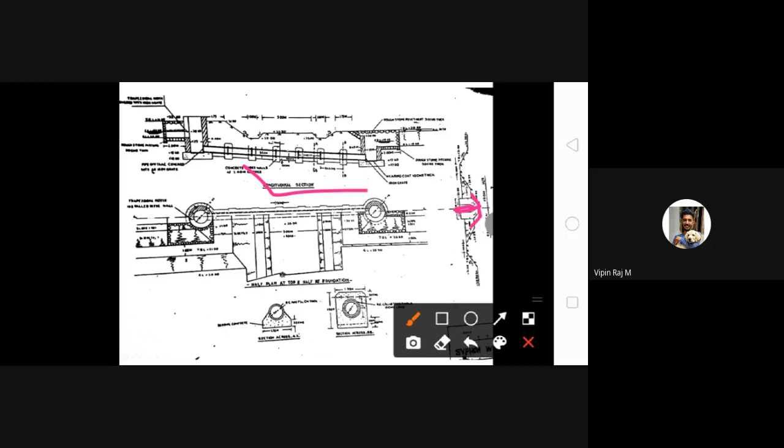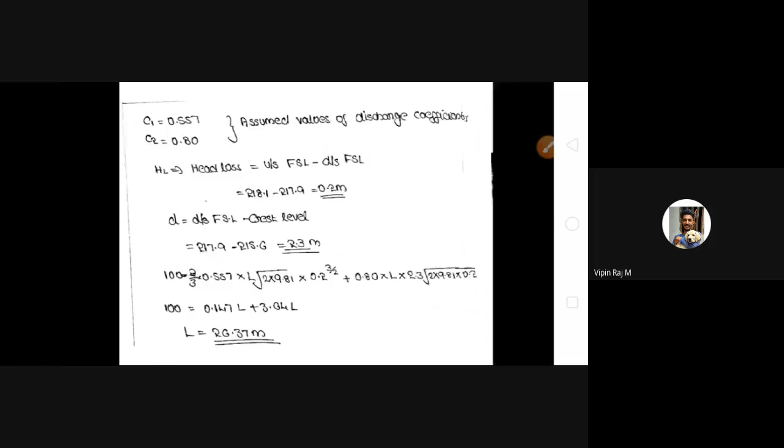So in the last class we discussed the design of cross regulator. Today also we are discussing the design of cross regulator itself. Yesterday we determined up to head loss. We completed our first step, that is design of crest, and then we move on to the second step, that is the length of waterway.

In order to determine the length of waterway, we use an equation Q equal to 2 by 3 into C1 into L root 2G into head loss raised to 3 by 2 plus C2 into L into D; here L, D are two different terms, so write it as L into D into root 2 into G into HL. Okay, you should by heart this equation.

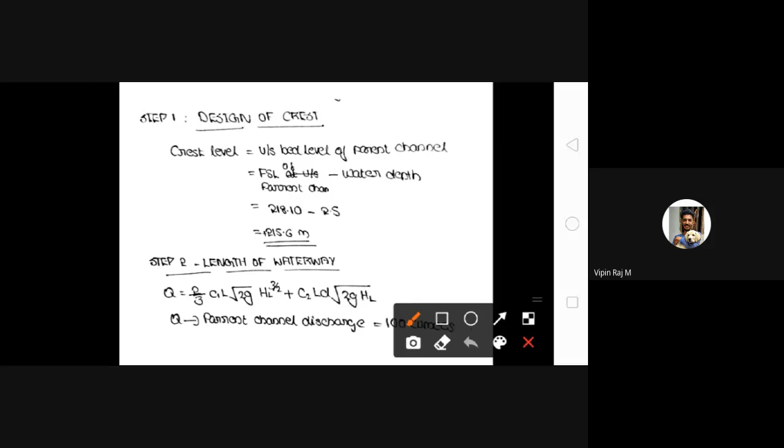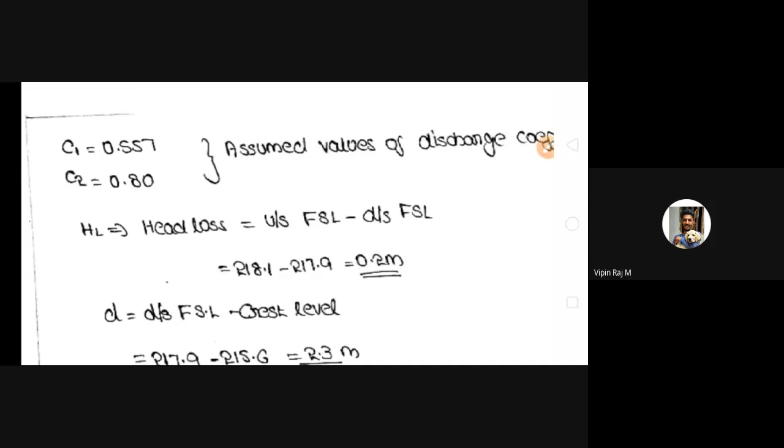And in this equation, we assume the value C1 is 0.557. We assume the value C2 as 0.80. We also determine the value of head loss. Head loss equal to upstream FSL minus downstream FSL. We get the value as 0.2 meter. Okay, then in this equation, there is another parameter which is D. So we need to find out the value of D.

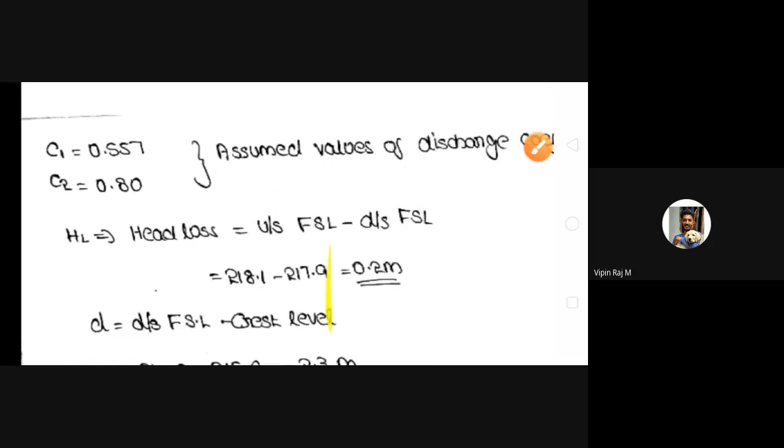Okay, how can we determine the value of D? D is downstream FSL minus crest level. Okay, what's the crest level? We already determined the crest level as the bed level of, sorry, upstream bed level. What's the value of crest level? You already determined it in the last class. Okay, 215.6 is the crest level.

Then what's the value of downstream FSL? What's the value of downstream FSL? Okay, the value of downstream FSL is 217.9.

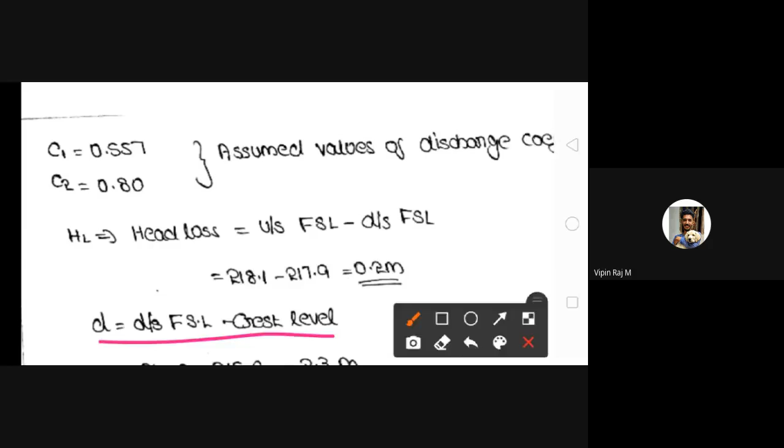Okay, then all of you put your answer in the chat box. What's the value of D? Okay, we get the value 2.3. Then we get all the parameters except L in this equation. So substitute these values in this equation and determine the value of L. I already substituted the values.

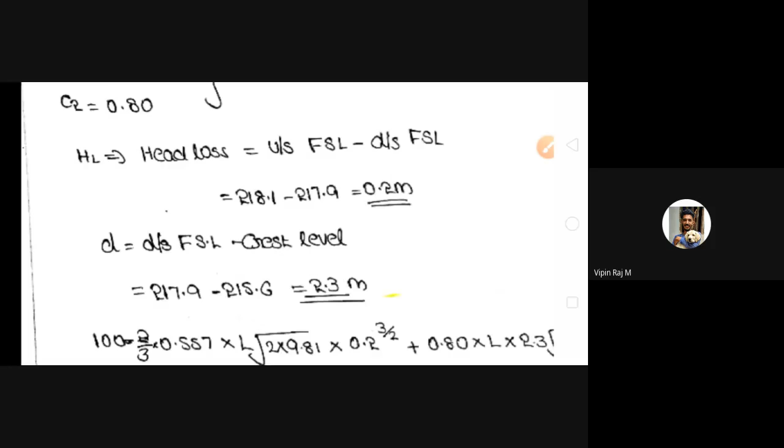100 equal to 2 by 3 into 0.557 into L into root 2 into 9.81 into 0.2 all raised to 3 by 2 plus 0.80 into L into 2.3 into root of 2 into 9.81 into 0.2. Okay, this is the substituted equation. Please go through the equation and find out the value of L. Or you can simplify the equation.

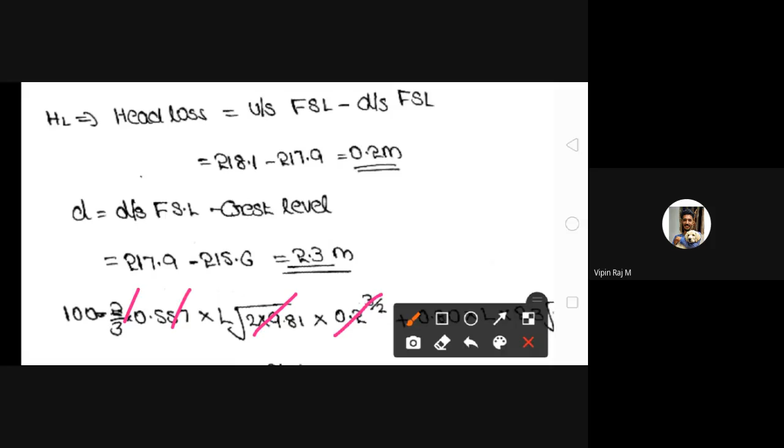Firstly, you find the value of 2 by 3 into 0.557 into root 2 into 9.81 into 0.2 all raised to 3 by 2. Firstly determine that value. Aduna, what's the value? Just take the first part only. What is the value of the first part? Aduna? Okay, Adira. Okay, 0.147. Correct. Then take the second part.

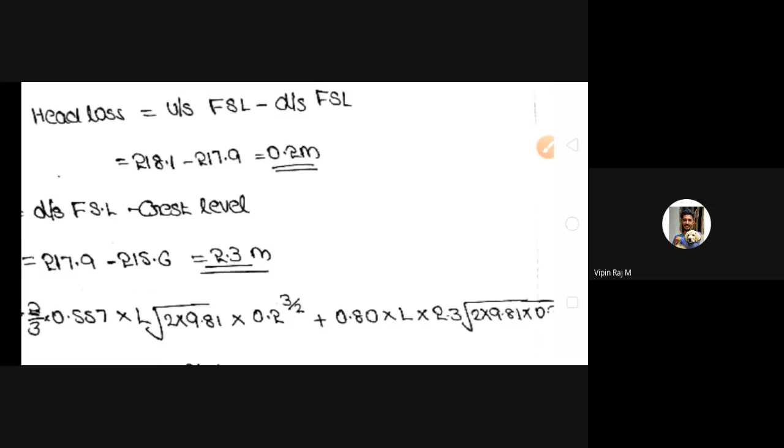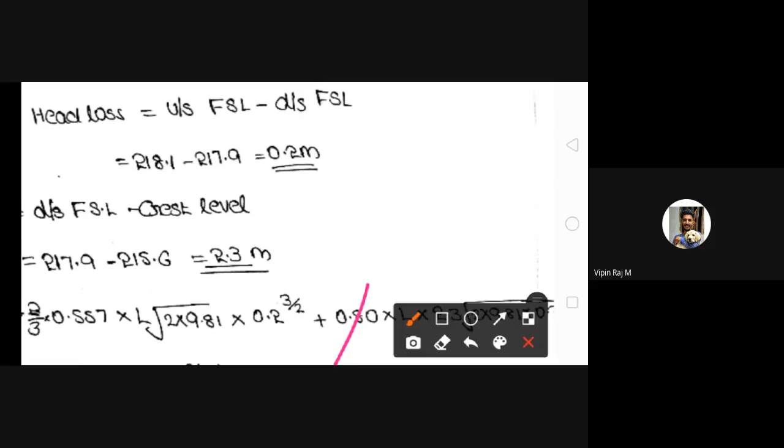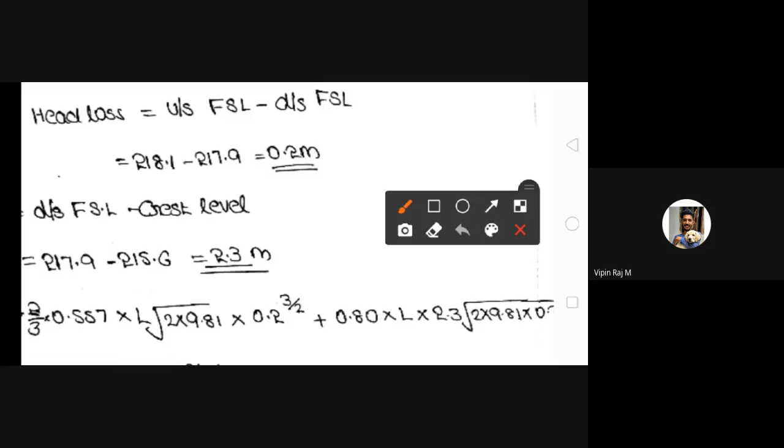0.80 into 2.3 into root of 2 into 9.81 into 0.2. Take the second part, then determine the value of the second part. Danya, please do the calculation and put the answer in the chat box. Second part only. Danya. Okay, Sijin. Okay, 3.64. Correct. So we can write the equation like this.

100 equal to, that is our full supply discharge, 100 equal to 0.147 L plus 3.64 L. From this, determine the value of L. Determine the value of L. Sandra Casey, determine the value of L.

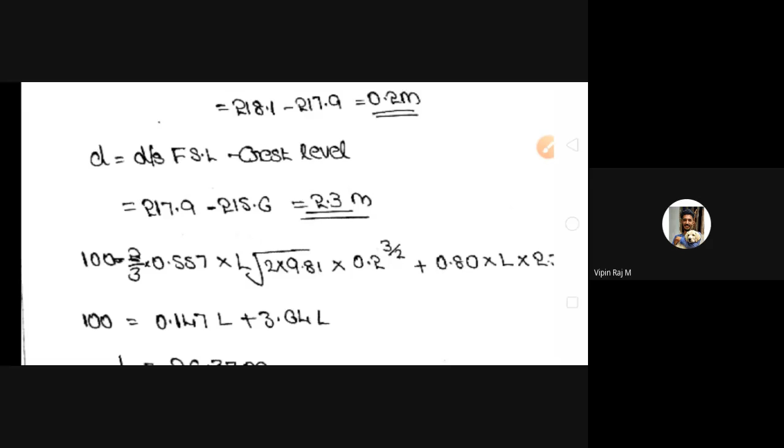Okay, 26.4. Very good, correct. So we get the value of L as 26.37. Okay, what do you mean by this L? This L means this length.

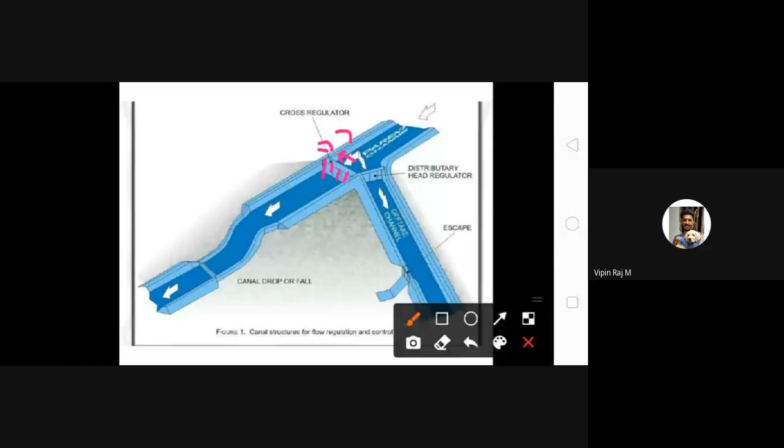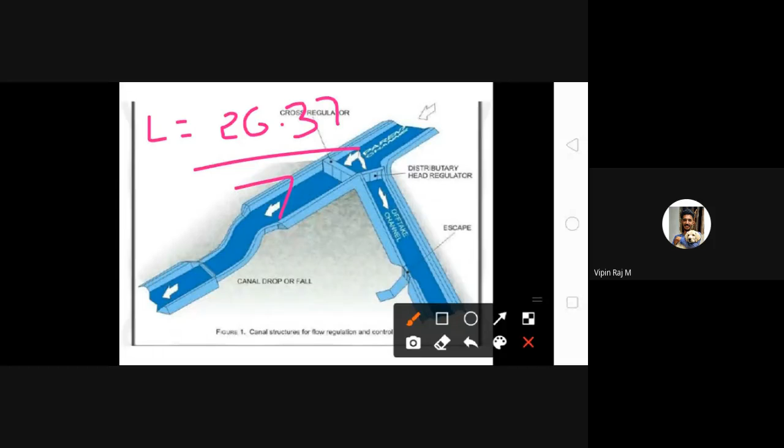Okay, here assume the span as 7 meter. Then determine the number of spans. We know that the total length is 26.37 and the length of each span is 7. Then what will be the number of spans? Number of spans will be total length divided by length of each span. Rishil, what is the answer? Okay. We get the value as 3.7. We can round it and take it as 4 numbers.

Okay. Then we find the actual clear waterway.

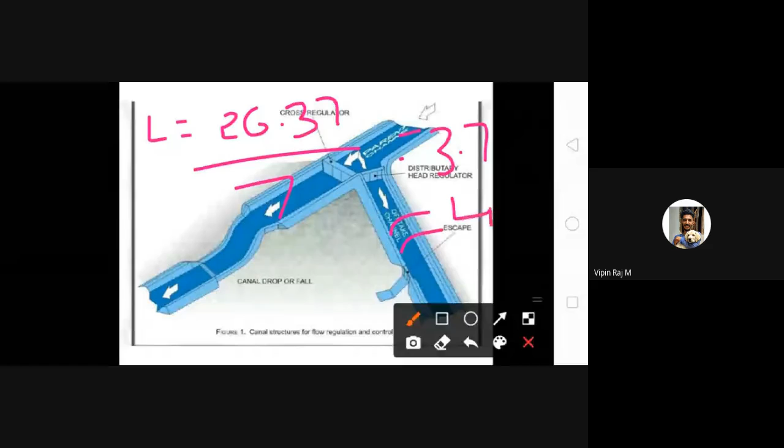So actual waterway equal to 4 into 7. Okay, what will be the actual waterway? Rishil, what will be the actual waterway? Okay, Vipin, what is the actual waterway?

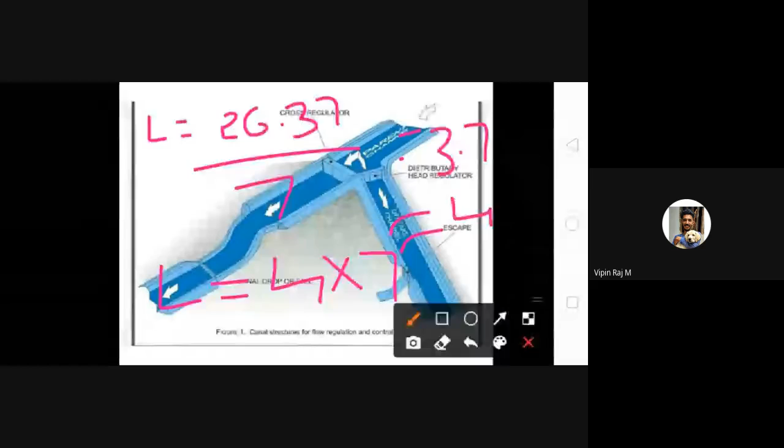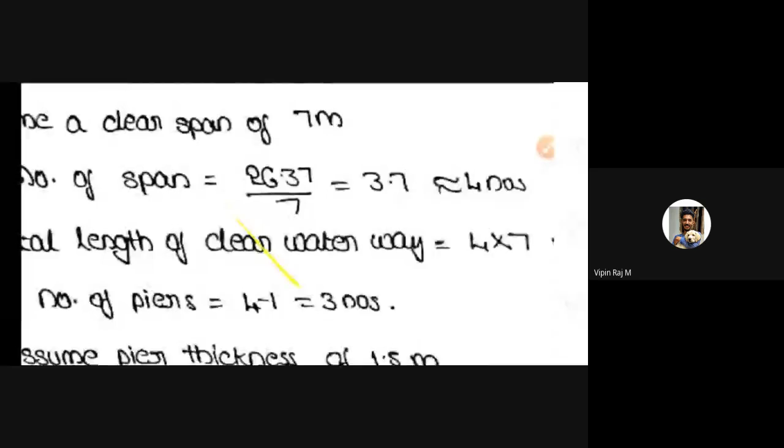Okay, 4 into 7, which is equal to 28. So that's all about the length. Okay, that's all about the total length of clear waterway. We get the value as 28 meter. Did you understand up to this?

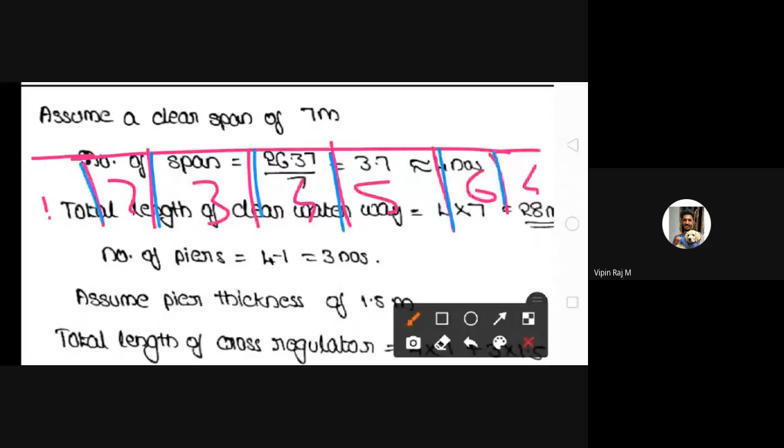Here the number of spans is 4, so the number of piers will be 4 minus 1, which is equal to 3. Okay, then we need to assume the pier thickness.

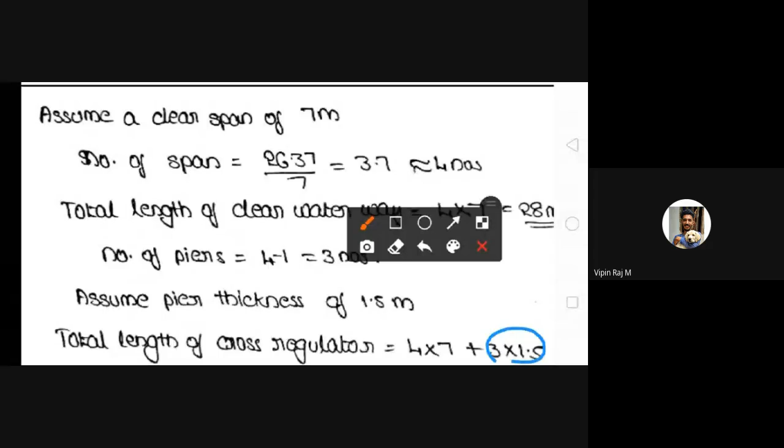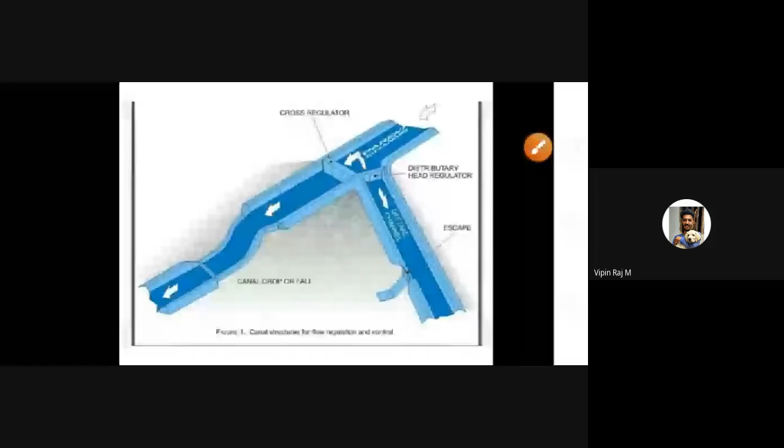Okay, then determine the value of total length of cross regulator. Sandra Vasudevan, what's the value of total length of cross regulator? Okay, very good. We get the value as 32.5. We get the total length of cross regulator as 32.5. So if we take this image, the length from this portion to this portion will be equal to 32.5, and the length of clear waterway...

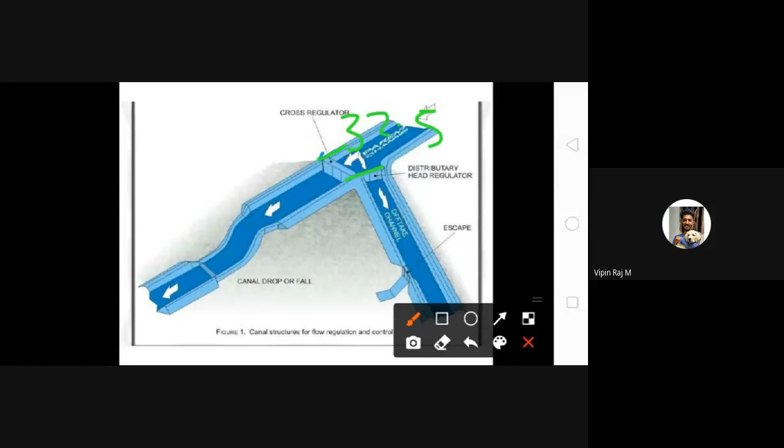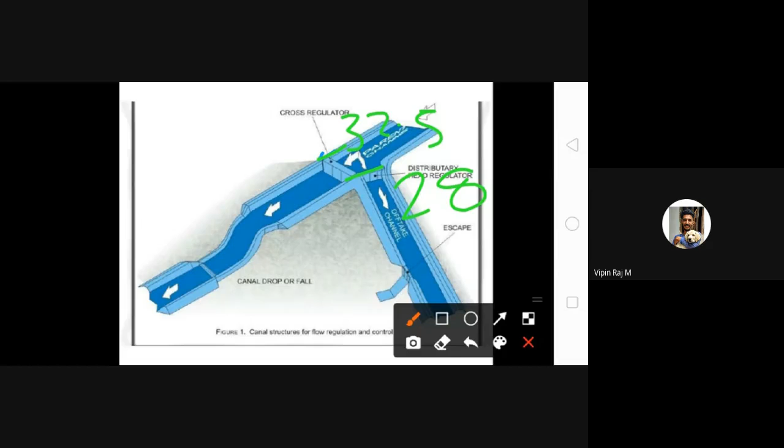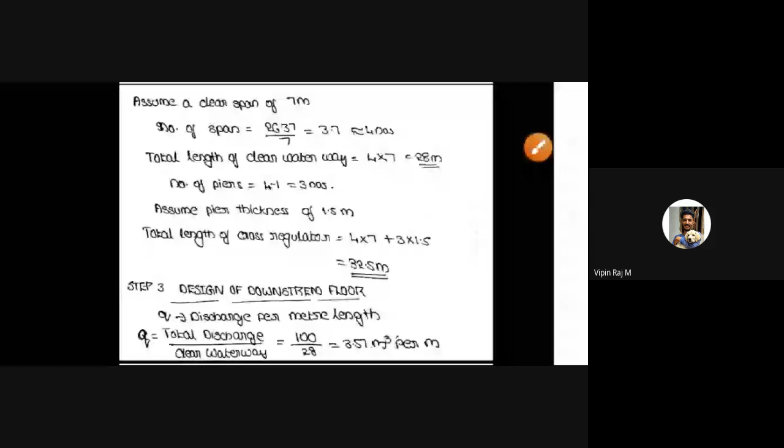So length of clear waterway is 28 meter and the total length of the cross regulator is 32.5. Did you understand up to this? Okay, then we move on to step 3, that is design of downstream floor. Step 3 is design of downstream floor.

Okay, in order to determine the downstream floor level, we need to find out the value of q. q means discharge per meter length. The value of q equals total discharge, that is 100, divided by length of clear waterway.

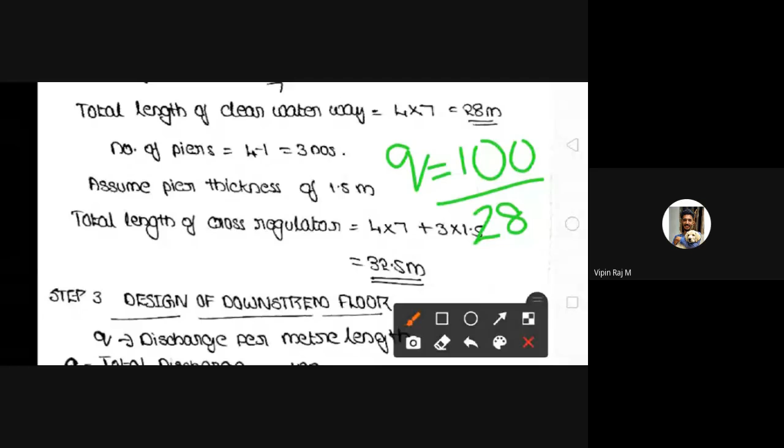The clear waterway length is 28. Okay, so the value of q equals total discharge divided by length of clear waterway. Okay, Sri Lakshmi, what's the value of q? That is discharge per meter length.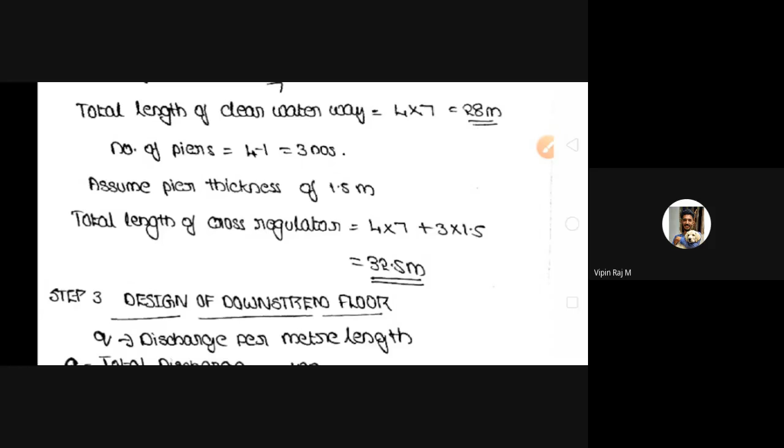Okay, so correct. 3.57. And the unit is meter cube per meter. Here Q means discharge per meter length. So we can write it as 3.57 meter cube per meter.

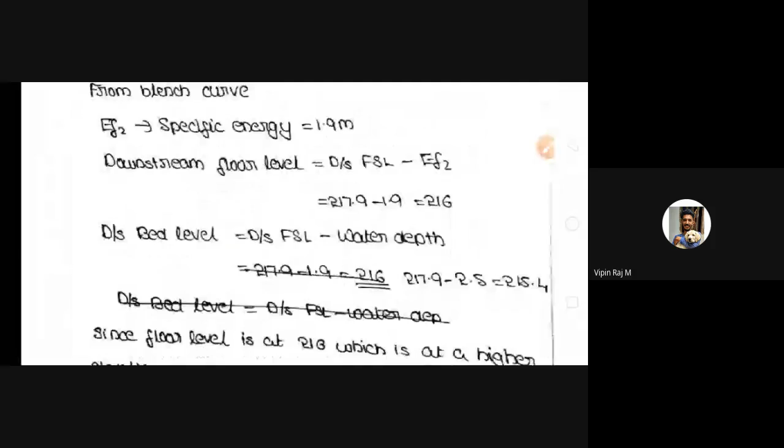Then we move on to Blench curves in order to find out the value of EF2.

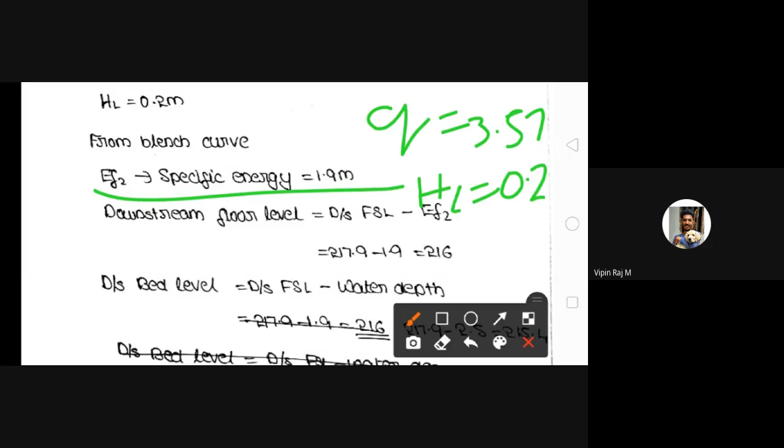Then we move on to the Blench curves. From the Blench curves, we need to determine the EF2. EF2 means specific energy.

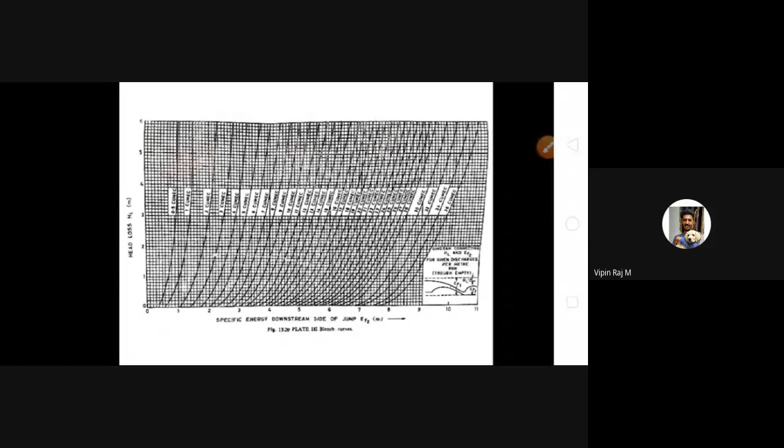So we need to determine EF2 for the further design of cross regulator. This is named as the Blench curve. For the examination, you will be provided with this Blench curve. In this Blench curve, the x-axis is specific energy, that is EF2, and y-axis is head loss. In this figure you can see some curves which indicate Q.

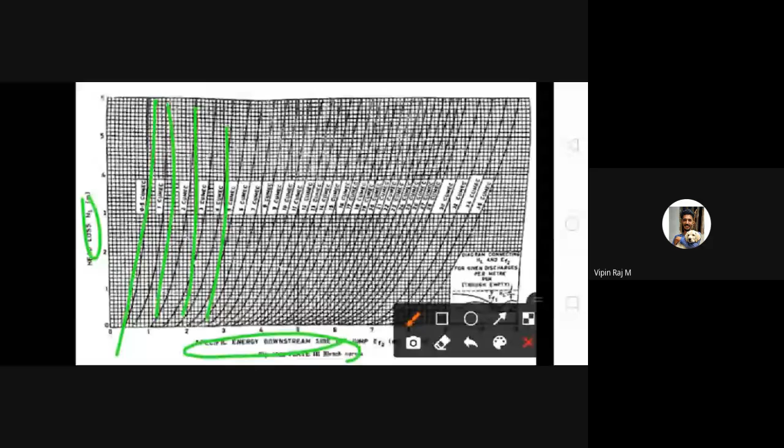So in this image we know two parameters. Head loss, that is 0.2 meter, and the value of Q, that is 3.57. So firstly we move on to Q. Here this is a curve which indicates 3 and this is a curve which indicates 4. But we have the value of Q as 3.57, so assume a curve in between 3 and 4.

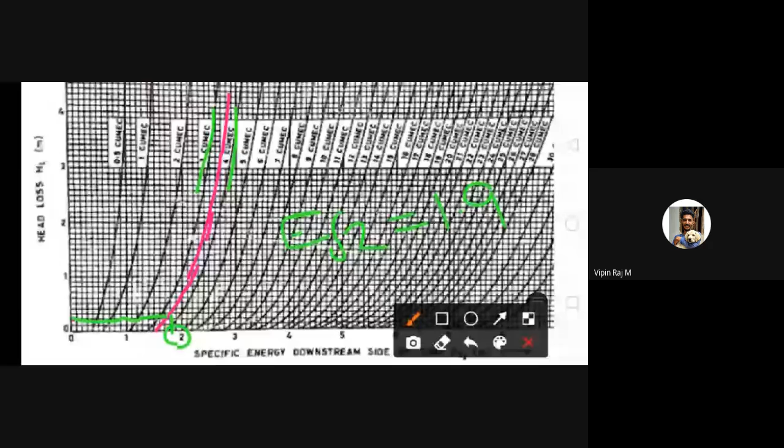Firstly, we take the curve which has the same value of Q. Here, there isn't such a curve, so we assume a curve between 3 and 4, which indicates the curve of 3.57. After that, we project a horizontal line from the head loss, and from the point that this line touches this curve, we draw a vertical line downwards, and the point at which this vertical line touches gives the EF2.

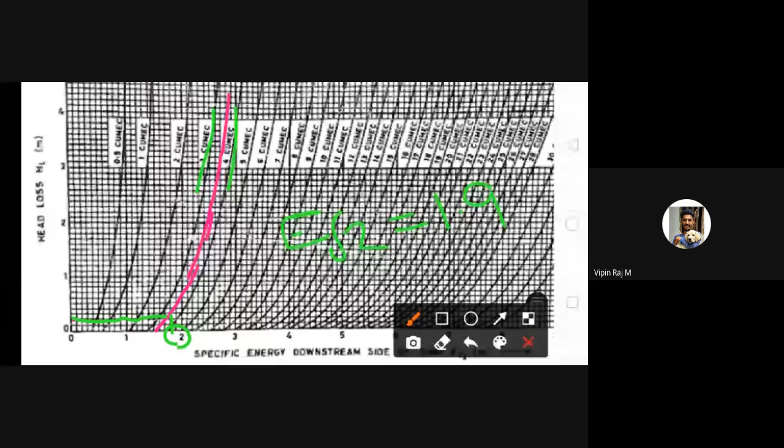So we get the value of EF2 as 1.9. Then, the reason we found this is that we need to determine the downstream floor level.

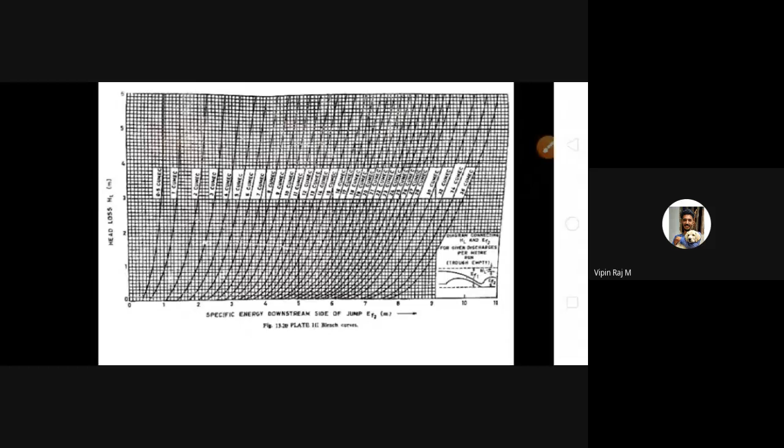So we need to determine the downstream floor level. Downstream floor level equal to downstream FSL minus EF2. What's the value of downstream FSL?

Shamjas, what's the value of downstream FSL?

Okay, 217.9, already given in the question. Then we get the value of EF2 as 1.9. So determine the value of downstream floor level. Vismaya, what's the value? Sorry, it's not 219.8. Vismaya, we need to subtract the value.

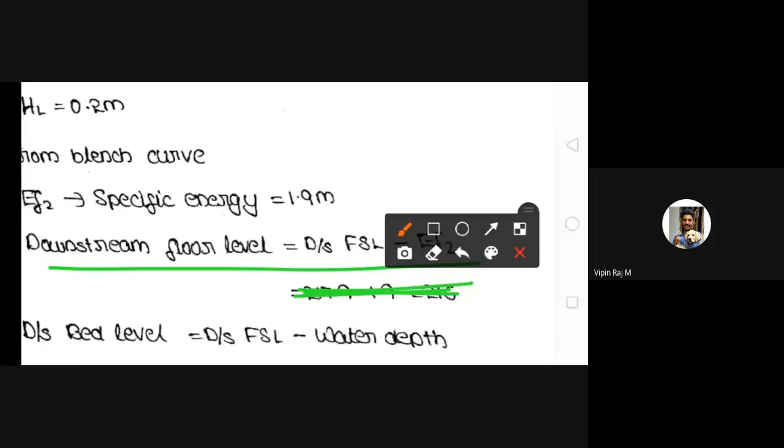Okay, 216, correct. So determine the downstream bed level. Downstream bed level equals downstream FSL minus water depth. What's the value? We get the value of 215.4.

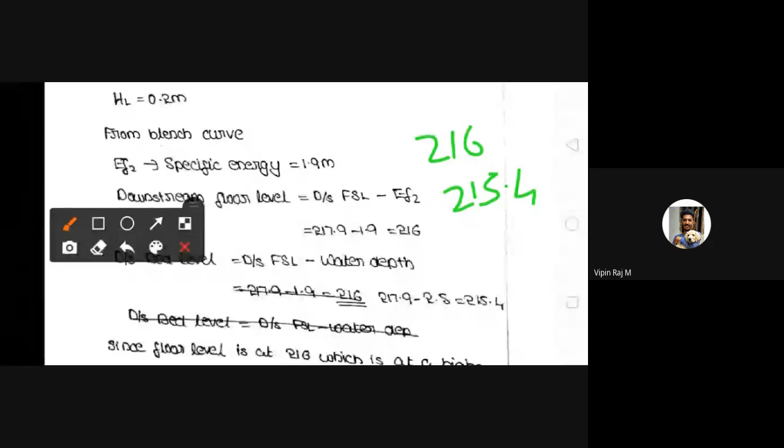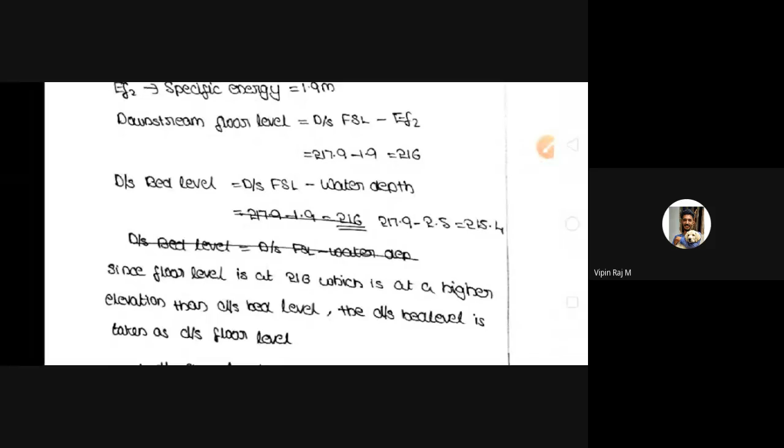So here, since floor level is at 216, which is at a higher elevation than downstream bed level, the downstream bed level is taken as downstream floor level. Therefore, downstream floor level is 215.4. Did you understand up to this?

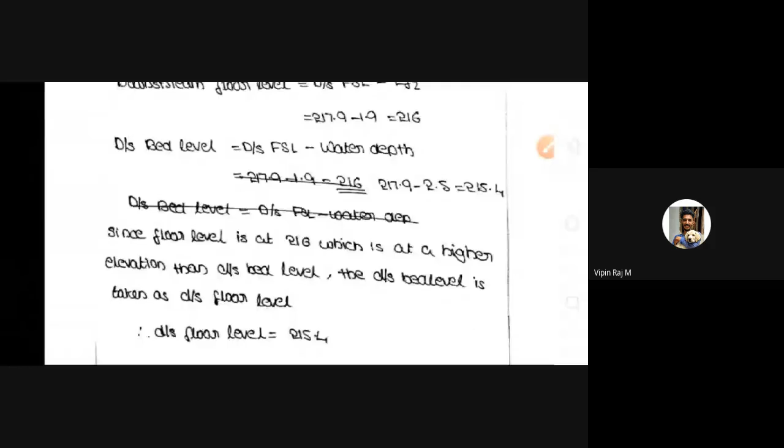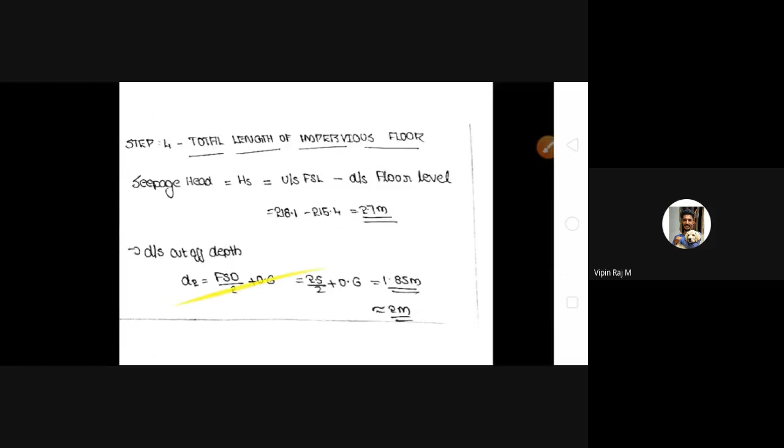Okay, then step 4, total length of impervious floor. Our step 3 is complete - we found the downstream floor level. So step 3 is completed. Then we move on to step 4, that is the total length of impervious floor.

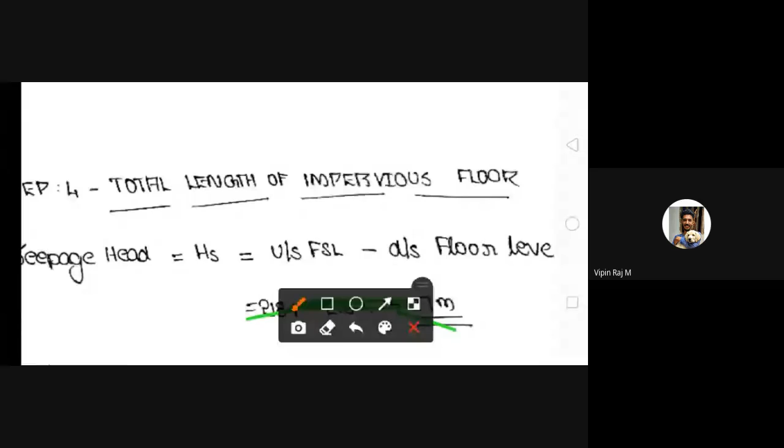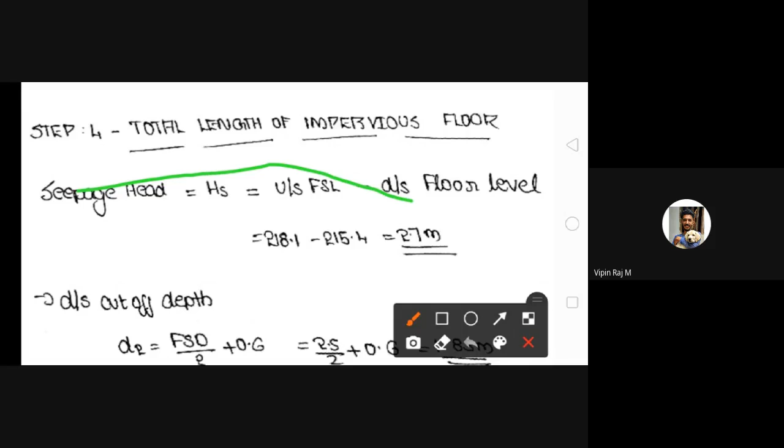Then we need to determine the downstream cutoff depth. We have an equation D2, downstream cutoff depth. We provide a floor in this manner: this is upstream side, this is downstream side. In this floor we provide cutoff walls at upstream and downstream. The depth of upstream cutoff is taken as D1 and the depth of downstream cutoff is taken as D2. Firstly we determine the value of downstream cutoff.

The depth of downstream cutoff: D2 equals FSD by 2 plus 0.6. FSD means full supply depth at downstream, and FSD is 2.5. So D2 equals 2.5 by 2 plus 0.6. Then what's the value of D2?

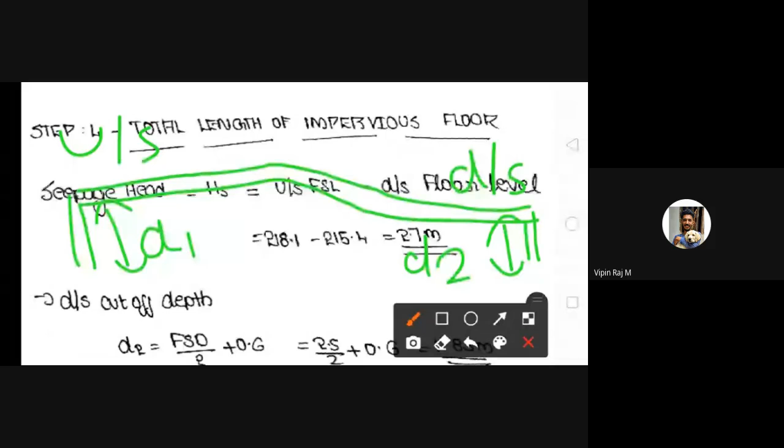That's the value of D2, Akash. Okay, Akshaya K, that's the value of D2. Okay, 1.85, correct. We get the value of D2 as 1.85.

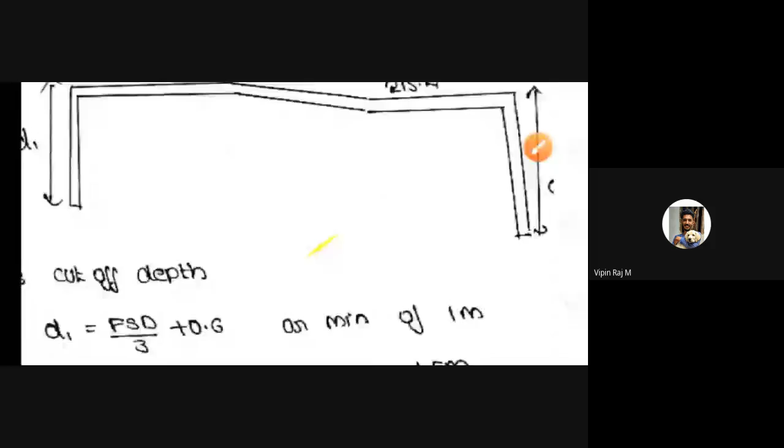It means, if this is the image of the floor, this is the upstream cutoff, this is the downstream cutoff, and we get this value of 1.85. We can round it and take it as 2 meter. Now downstream cutoff is always better to give a bit extra. So we take the value as 2 meter. Even though we get 1.85, we round it and take it as 2 meter.

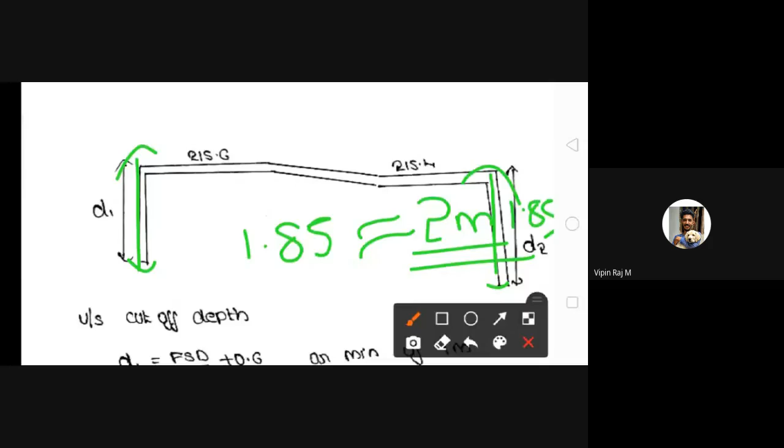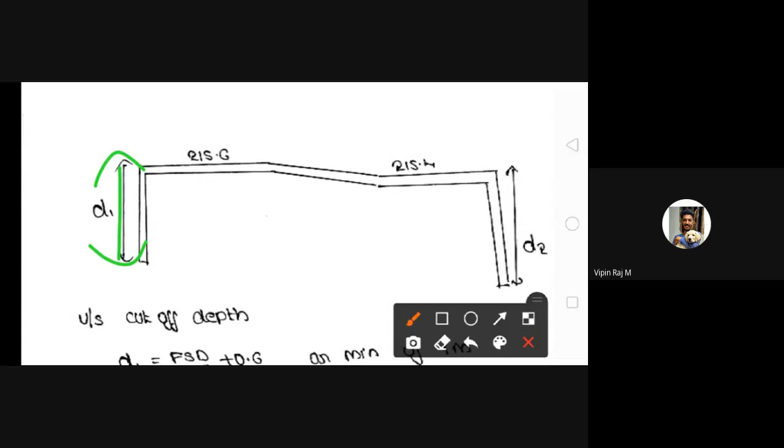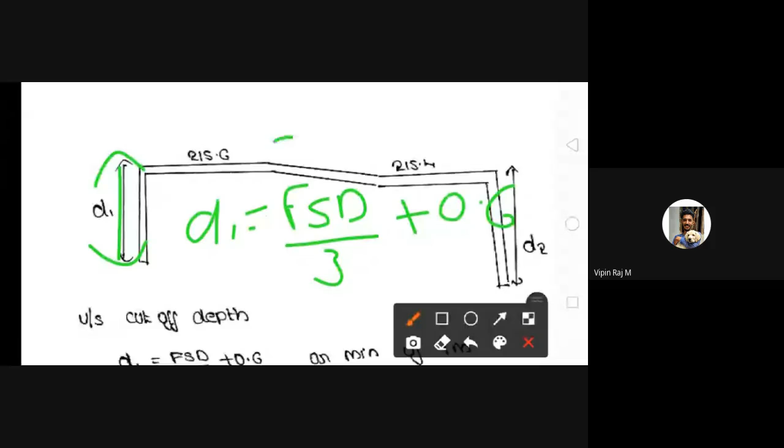Then we need to determine the upstream cutoff depth, that is D1. It also has an equation: D1 equals FSD divided by 3 plus 0.6, or minimum of 1 meter. FSD means full supply depth at upstream, provided in the question as 2.5 itself. So 2.5 by 3 plus 0.6, or minimum of 1 meter.

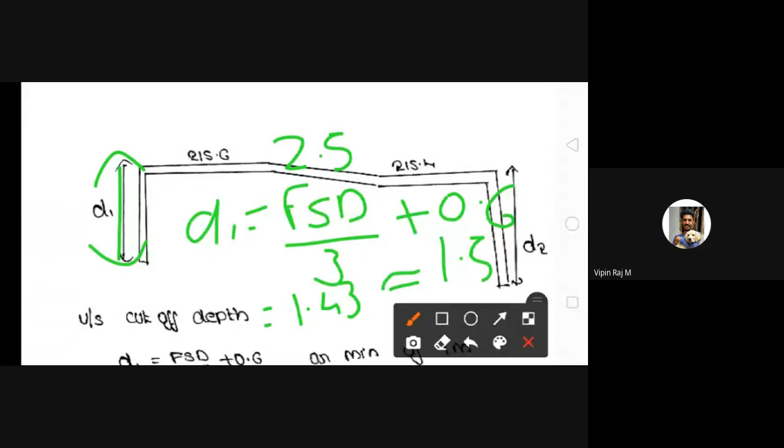Okay, did you understand up to this?

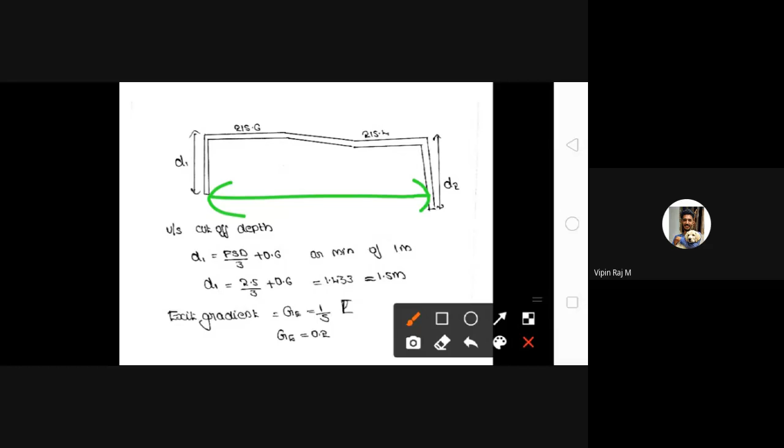Okay, then we need to determine the total length. To determine the total length, we need the values of D2 and D1, which is why we first calculated those. So we need to determine the total length. In order to determine the total length, firstly we need to determine the value of lambda.

So we use an equation: exit gradient GE equal to seepage head divided by D2, into 1 by pi into root lambda. In this equation, GE means exit gradient. The exit gradient is provided in the question. Arya, what's the exit gradient?

Exit gradient is provided in the question. Permissible exit gradient equal to 0.2, that is 1 by 5. So permissible exit gradient equal to 1 by 5 is given in the question. 1 by 5 means 0.2 itself.

Okay, then HS means seepage head. In this step, we firstly determine the seepage head. We get the seepage head as 2.7. Then D2 means depth of pile downstream. We got the value of depth of pile downstream as 2 meter. Then in this equation, the only unknown factor is lambda.

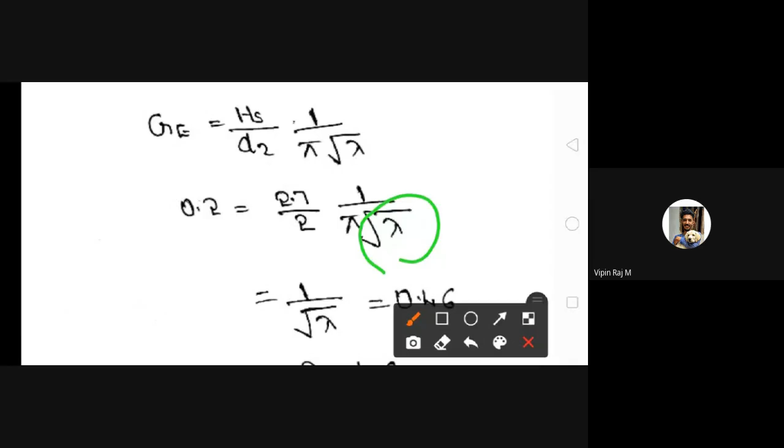Okay, then by using the value of lambda, we need to determine the value of alpha. For determining the value of alpha, we have another equation: lambda equal to 1 plus root of 1 plus alpha square, divided by 2. In this equation, the only unknown parameter is alpha.

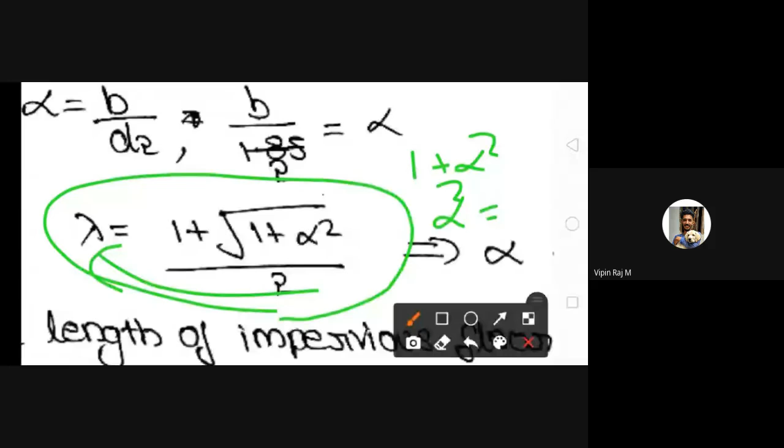Okay, I know it's time, but I will still complete this portion. We get the value as alpha equal to 8.17. We know that alpha means b by d2.

Here b is the total length of the floor. d2 is the downstream cut-off depth, that is 2 meter. Then find out the value of b.

Just calculate the value of b and this step is done. What's the value of b? Alpha equal to b by d2, and we know the value of d2 as 2 meter. So determine the value of b. b equal to 8.17 into 2. What's the value of b?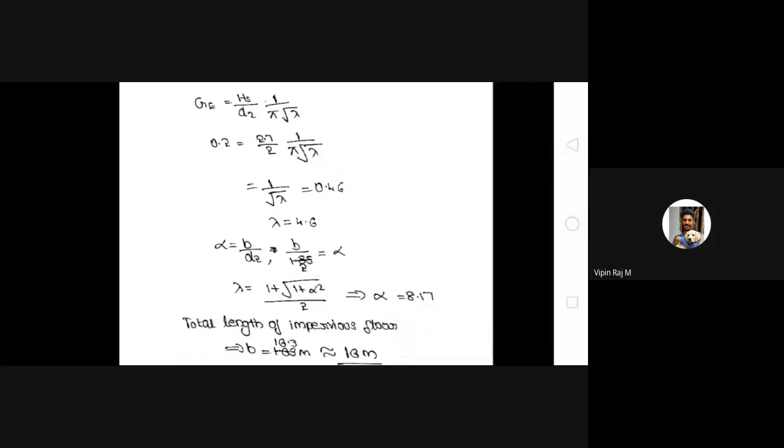Anyone answer? Okay, 16.3, correct, Anna. So we get the total length of the floor as 16.3. We can round it and take it as 16 itself. So we get the total length of floor as 16 meter. Okay, did you understand up to this?